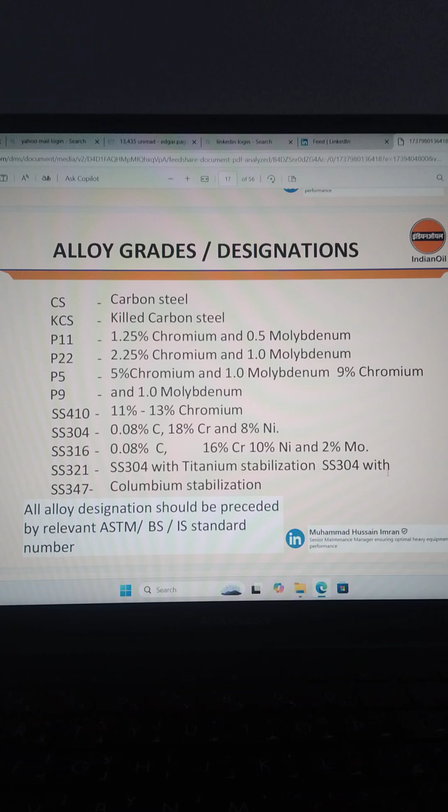Hello guys, let's continue part 3, the discussion and presentation of pressure vessel.

So we have to go on the materials, alloy grades and designations. That's why they put the alloy grades, because they mention all the related P numbers of the alloy steel. This is the most important part of the materials, to determine the grade, in order for the construction engineer or welding engineer to know the P numbers of the related grades. This is CS, P11, P22, P5, P9, and SS410.

So from this, the construction engineer or welding engineer can determine which welding procedure they want to utilize, because from this they can determine the electrodes and filler wires we are using when we conduct the fabrication and welding job. So without these grades and base metal characteristics, we cannot determine the application of the WPS, which contains the electrodes and welding rods. We cannot determine what we are using for this type of fabrication, connection and welding.

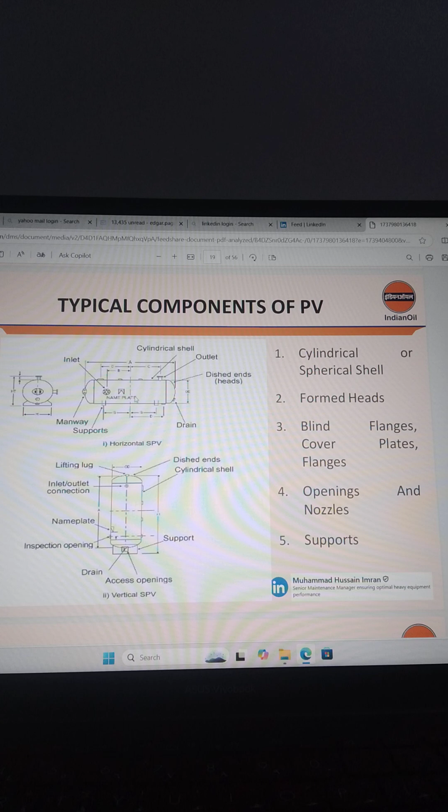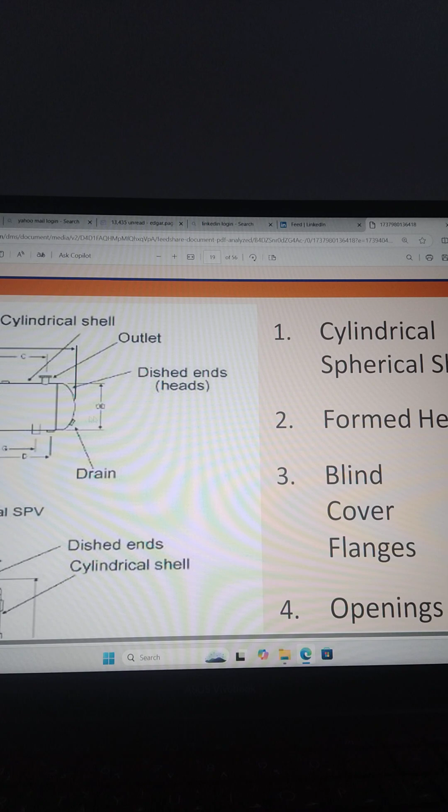Then typical components of PV. PV is a pressure vessel. These are typical components: number 1 is cylindrical or spherical shell, formed heads, blinds, covers, flange plates, openings, nozzles, and supports. If we talk components, meaning the parts of the pressure vessel. Let me say cylindrical spherical shell, this one. So this is the cylindrical shell. This is called components.

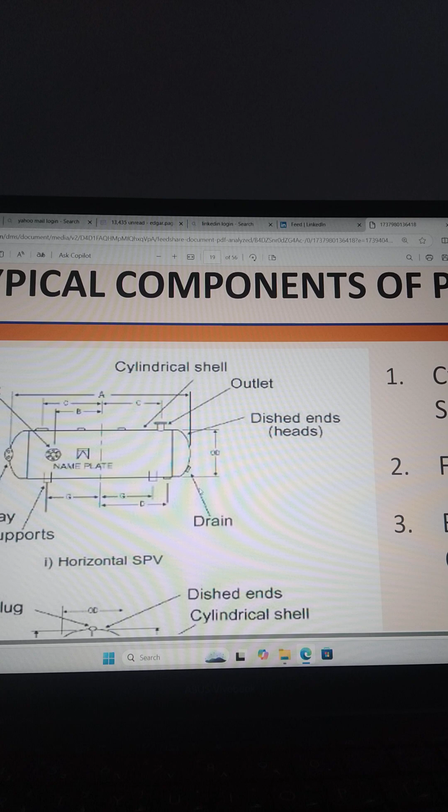This is the outlet nozzle, also called a component of the pressure vessel. And this is the dished head, fabricated welded type or flange type; this is also a component of the pressure vessel. Drain is also a component. Manways, supports, these are also components. So the fitted or connected parts of the pressure vessel are called components of the system.

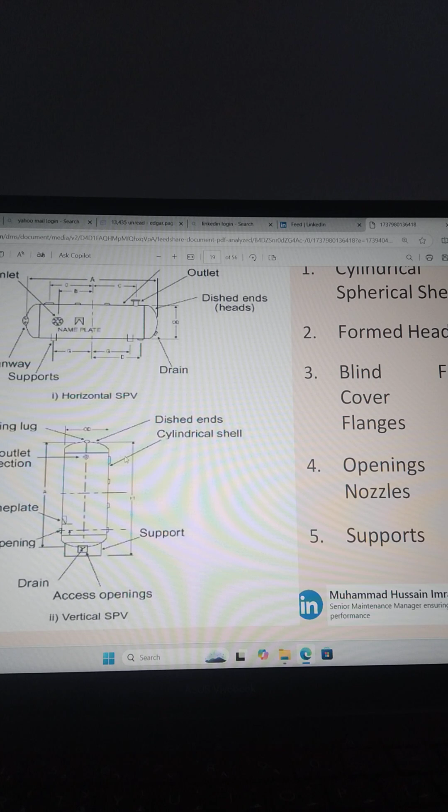Okay guys, then this is the lifting lug, side dish end, cylindrical shell, support, inspection opening, nameplate. Nameplate is also called a component of the pressure vessel. Inlet and outlet connections are also components. Any opening, any flange connection is a component of the pressure vessel.

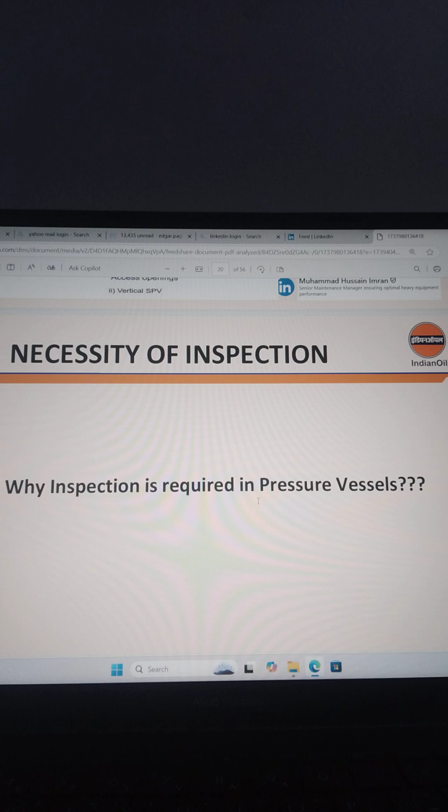Okay, necessity of inspection. Why is inspection required in pressure vessels? To determine the physical condition of the vessel, systematic and periodic inspection will also reveal the following: corrosion rate, remaining corrosion allowance, forecasting future repairs, replacement, minimizing probability of instantaneous failures, causes of deterioration and taking remedial measures, statutory requirement. Types of inspection: external inspection, internal inspection.

So this is necessity of inspection. We require inspection to determine the physical condition of the vessel, if the vessel is already used or already processed. For example, in manufacturing, the pressure vessel is under operation, so we conduct the inspection. There are two types of inspection: external inspection and internal inspection.

The plant should be shut off or shut down to make a physical inspection of that vessel in order to know the corrosion rate, allowance, forecasting future, minimizing probability. So they will conduct visual inspection of that pressure vessel. They will measure corrosion rate by the NDT method, forecasting future repairs. It means if some damage is found on the vessel, they will schedule the future repairs and replacement. The inspector will record the repair they have seen.